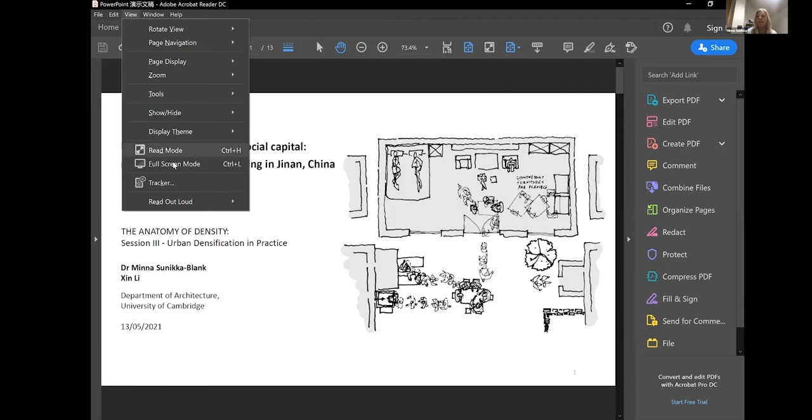So in our short presentation, we'll mainly say a few things about, let's say, the unintended consequences of urban densification on social capital. And we'll focus on Jinan in China as a case study. So Xin, if you put the next slide. So in the presentation I'll just give a very brief introduction to our framework and methodology, and then Xin will elaborate on the findings.

So what we have mainly been interested in is what happens in the urban regeneration project when households move from courtyard housing, what you see in this image, to high-rise, high-density housing typology. So Xin, if you put the next slide. That's the image on the right-hand side. So something which is very typical of Chinese urban regeneration, but a very common typology also in other parts of the world. So what makes China a very interesting case study, I think, at this moment, is that the big, massive national relocation project is coming to an end in 2021.

So there's a new approach or change in paradigm that regeneration would not be based anymore solely on demolition and rebuilding, but also renovation and gradual improvement of the neighborhoods by providing better insulation, lifts and services to the areas. Having said that, what always comes as a surprise to me is that in the Chinese context, an older building is a building that has been built before 2000, so also relatively new housing stock, but there's a kind of acknowledgement that the regeneration would need to address also, let's say, the social community.

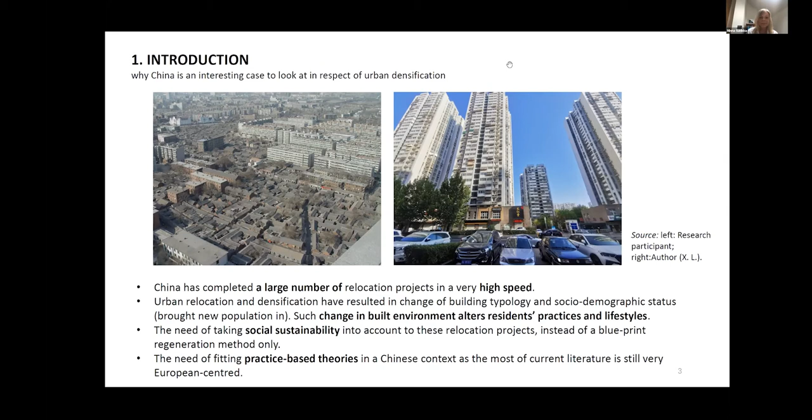And then while we use social practice theory as a kind of background, we combined that with literature from social capital. So we made a distinction among the respondents between whether they were stayers or newcomers. We categorized newcomers as people who moved to the area after the regeneration, and stayers were people who had lived in the area, for example, in courtyard housing before the regeneration. And we also looked at whether the interviewees were actually tenants or whether they were owner occupiers. And if you put the next slide.

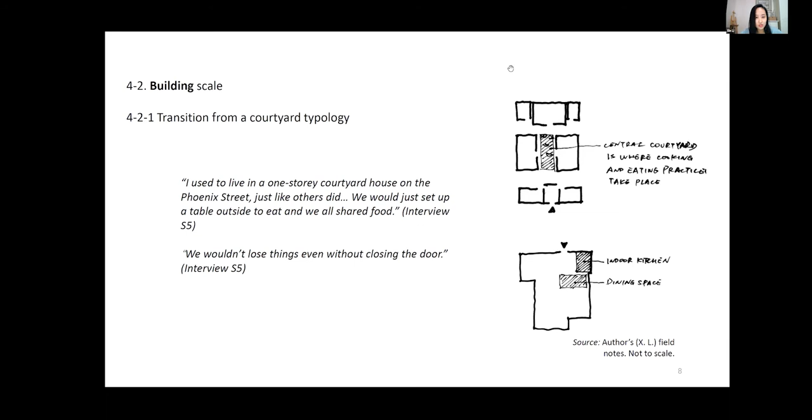At the building scale, before the restructuring, for stayers, daily activities such as cooking, eating, and hygiene took place in the central courtyard, outside. A key feature of living in such a courtyard typology as in the case study area is that residents can maintain a very close connection with their neighbors, meaning that more social interactions, especially informal ones, can take place in the neighborhood to build up mutual trust, which is one of the major effects of social capital in a neighborhood context. As one stayer commented, we wouldn't lose things even without closing the door. After the transition, these practices shifted from outdoors to indoors because the central courtyards disappeared.

In the courtyard house, furniture was used interchangeably and activities took place in a very flexible way. After the transition to high-rises, residents' need for privacy has led to inner spaces for particular uses. So this self-containment after the transition to high-rises has increased privacy and reduced the neighborhood social relations gained by sharing facilities. Further, the spatial dispersion of practices after the restructuring is not only caused by the change in the housing typology, but is also a result of a changing culture of living, moving from a collective form of living to more individualized practice performances.

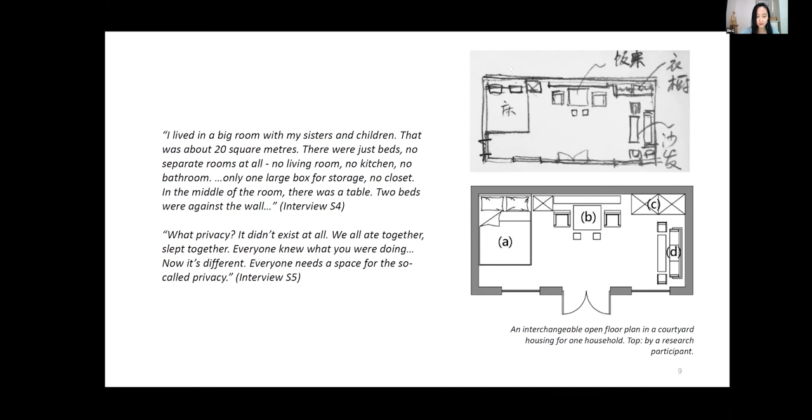And finally, a strong identity with the people and a sense of attachment to the area are mostly found in long-term residents and locally extended families. So a strong social network was formed by them. In this network, stayers maintain very close relationships with each other, and it tends to exclude newcomers, especially tenants. This is an outcome regarded as the dark side of social capital.

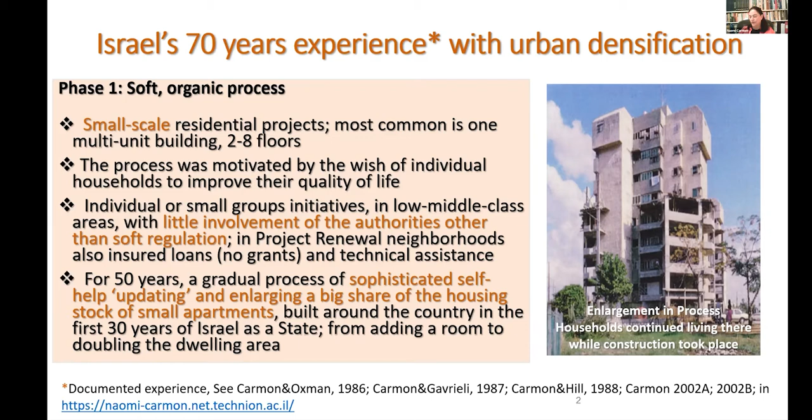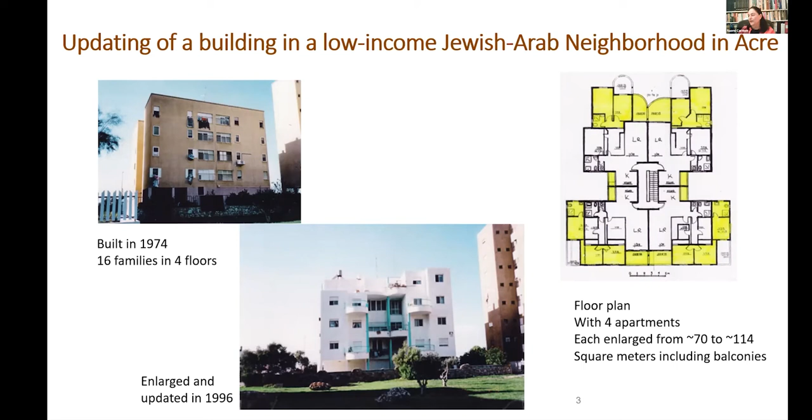We have here a nice example in a Jewish Arab neighborhood in Akko in Israel, Acre. You see the before, you see the after, and you can see in yellow the floor plan enlargement that made a real change. You have here 4 apartments in 1 floor and the enlargements. Okay, phase 2.

Intensive densification. That's in the new millennium. Urban densification is at the top of the government housing agenda. Unlike the first 50 years, now in the recent 20 years, it's up on the agenda because the government realized we have to build so many new houses and we don't want to take all the open land of the country for that. It's a small country. So densification is the preferred solution.

Resilience requirements were added, strengthening the buildings against earthquakes and building shelter rooms in each dwelling. It's especially needed in Israel, but as you know, resilience requirements are needed around the world in some way or other. And all that is expected to happen with the private market alone responsible for financing and execution. There is a general framework of public regulation and some master plans, but on the whole, it's the private market.

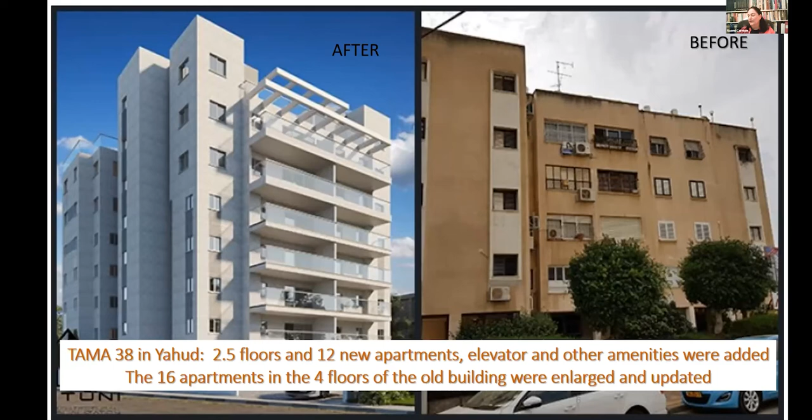There are 2 major outline plans: demolition and redevelopment, that's a kind of aggressive, in our words, densification, and a softer kind, Tama 38. I have here 2 illustrations. This is demolition and redevelopment, and the other one is Tama. You can see Tama 38 before and after. We are going to concentrate on this kind of program, and the floor is yours, Nava, to continue.

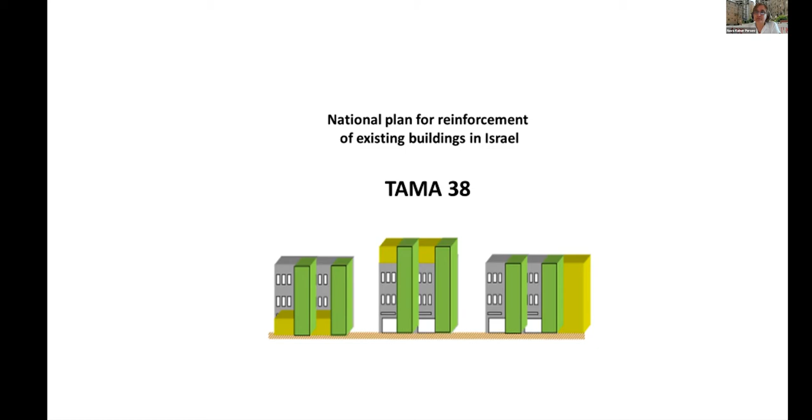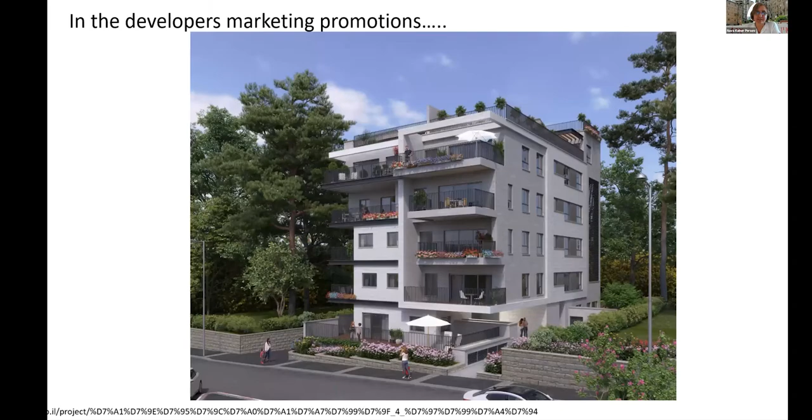Thank you, Nomi. So Tama 38 is really more like a medium-sized densification plan compared to the demolition and reconstruction that Nomi just showed. Tama 38 is a national plan for reinforcement of existing buildings in Israel. Here we can see the Tama in the developer's eyes, in a way kind of a villa in the park. But in reality, as we go on, we can see the Tama in the urban fabric as it looks.

So I'm going to concentrate today very shortly on a case study in Ramat Gan city, called the Negba area. Ramat Gan is very vibrant regarding Tama 38, second only to Tel Aviv. And this is part of a larger research, part of my PhD dissertation regarding housing regeneration strategies and their evaluation from the social justice point of view.

So I'll start with the first years, when Tama 38 was initiated in 2005. The local municipalities didn't really know what to do with this national plan, and they just created a uniform planning layer for the whole city.

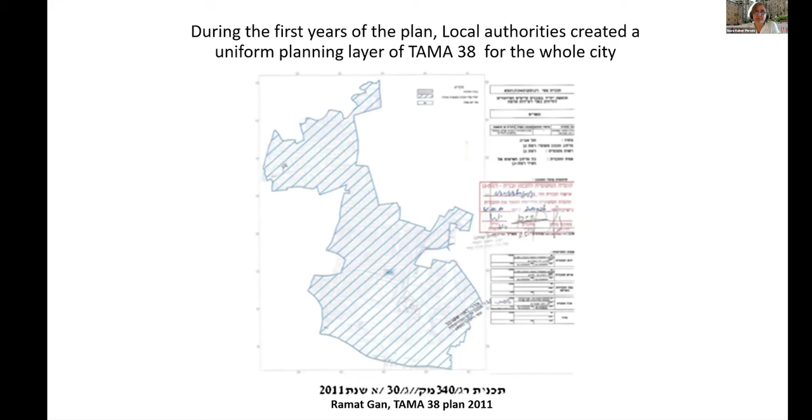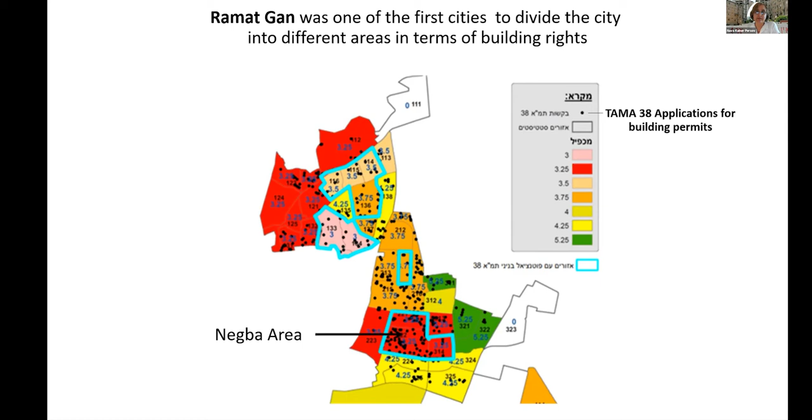After buildings started to be built in certain areas, and this is the Negba area, municipalities started to understand that they need to do something else, because they couldn't really realize all of those housing units as one uniform layer on the whole city. And they started to create special urban regeneration master plans that reflect the different areas of the city. And this is the area that we have studied.

This is an ex-post evaluation research, part of a larger research where we interviewed almost 100 households in Tama 38 and in demolition and development. In the Negba area, those are the buildings where we interviewed the residents. You can see that those buildings were not demolished, but I think this building here in Hasar Moshe exemplifies it best. You can see the first 3 stories, which are the original existing building, and on top of it, you can see the new floors. If you take a closer look at each photo, you can see it really easily as you walk on the street in Israel.

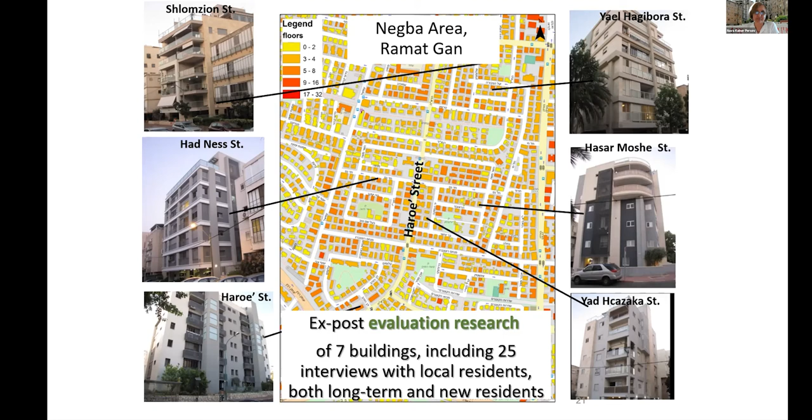So we have interviewed local residents, long-time residents and new residents, as well as architects, developers, lawyers, and city representatives. So I'll go to some very quick findings from this research. The first perspective will be of the long-time residents. We have to keep in mind that the urban regeneration programs in Israel since the 2000s are actually an economic deal between developer and homeowners. The homeowners sell the developer their building rights, and in exchange, they receive an additional room to their own apartment called a sheltered room, a mamad in Israel, which these days is really important.

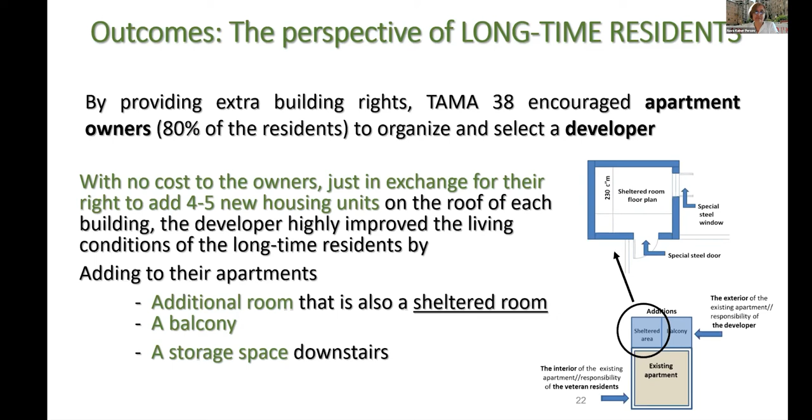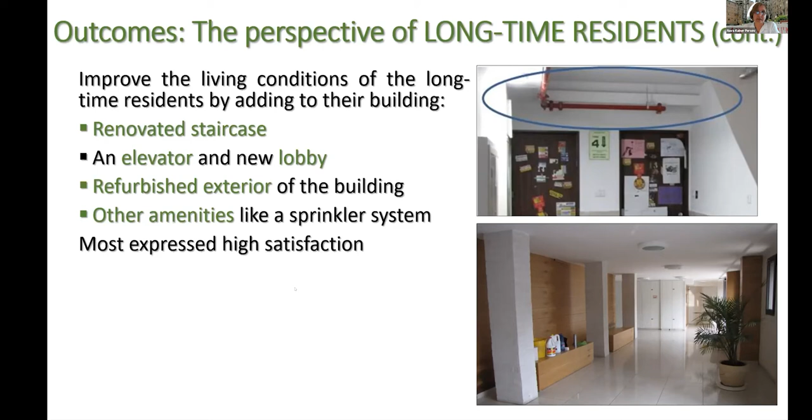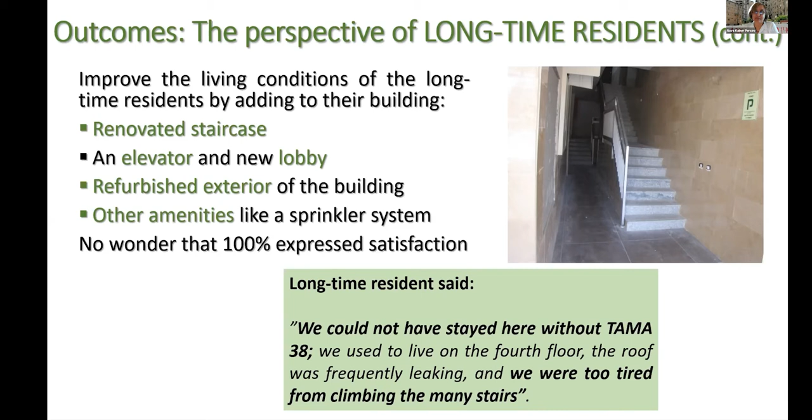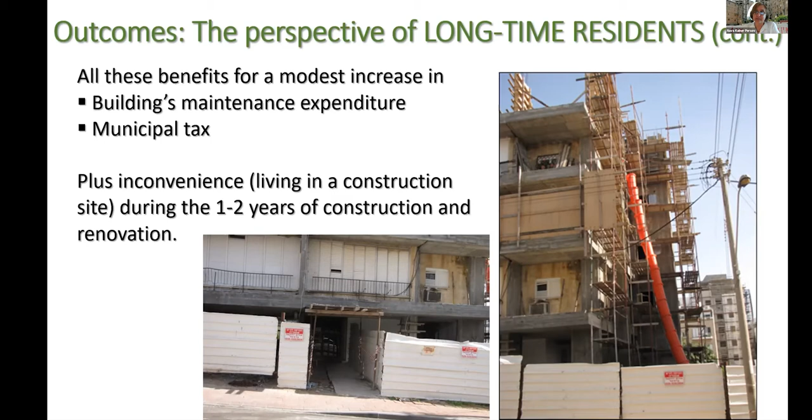Most of the residents are really very satisfied with this project. One elderly resident told us they could not stay in the building if they didn't have the elevator, since they had to climb up 4 floors. So this was really helpful for people who lived there for many years to stay in the same place. Of course, there were also obstacles, since the residents still live in the building while construction is taking place. They told us about the noise, the dust, the different people coming in and out, and even sometimes burglary in the building.

Now I'll move to the new residents, and one of our interesting findings was that the new residents in the Tama building are actually long-time residents in the neighborhood. 63% of the people we interviewed told us that they live on the same street or the same area. One of them said that she lived in the next building, saw the Tama building growing from her window, and wished that one day she would move in, and they actually did, and they were so happy about it. They could stay in the same neighborhood, same friends, same workplace, school for the kids, and more.

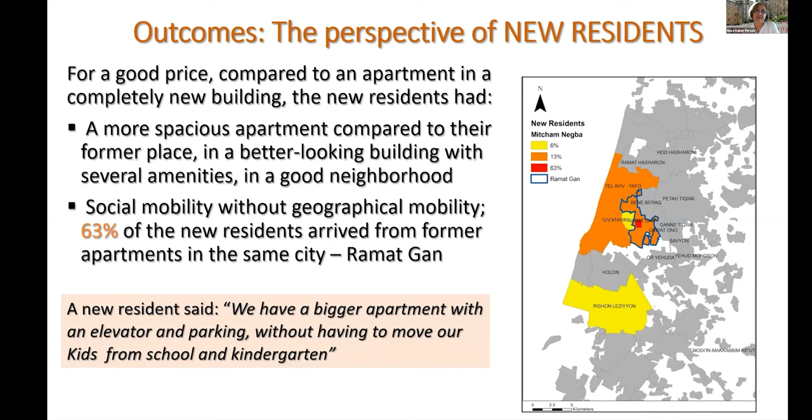However, from the city's point of view, the city realized that there is a problem with the carrying capacity of the different areas. More than that, as part of the incentives given to Tama 38, some municipal taxes are waived. So the municipality has some budget shortage in providing all the public services to the new residents coming in.

And I will end this case study about Tama 38 with another thing we found out: if in the city we have an old apartment in an old building, most of the time small, or on the other hand a new apartment in a new building, Tama 38 gives us steps of more affordable housing in the city. So we have an old enlarged apartment, a renovated apartment, as well as a new apartment in Tama 38, which gives many more opportunities to different homeowners to come and stay in the center of the city. Nomi, now it's your turn.

And I would like to conclude our presentation by saying that we need various strategies for different cities with diverse populations, with a diverse forecast for population growth, real estate markets, and cultural groups. Our analysis of the Israeli case introduced two non-aggressive strategies that we put an emphasis on. We did not talk about the demolition and redevelopment that we also have.

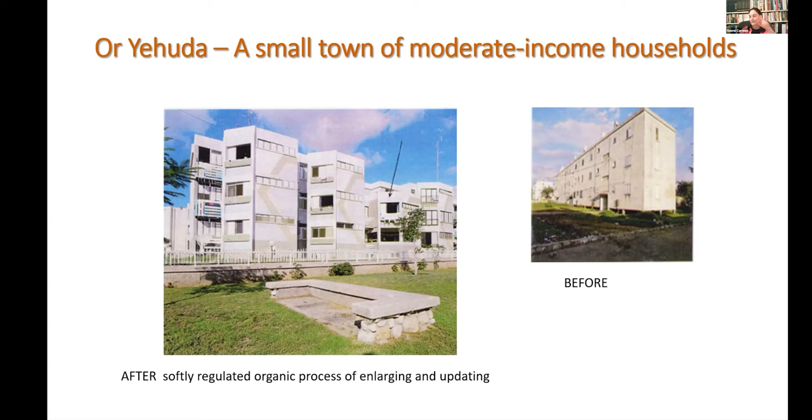The second soft strategy we presented is densification without demolition of the old buildings, style of Tama 38. Its implementation differs according to the real estate values in the area, between hot demand areas and low demand areas. In hot demand areas, the economic forces are so strong that the process can work with no public money. However, in order to avoid harms, as we have seen in Israel, it needs public regulation, not public money. General guidelines by the government authorities, plus a policy document of the municipality considering the carrying capacity of different neighborhoods. The story is very different in low demand areas.

There, the economic forces are so low that planners and other stakeholders should enact and synergize special tools of 5 fields: planning, engineering, financing, which means pulling public, private, and third sector resources, social communal tools, and administrative managerial. We have no time to talk about a big research that we are currently working on in Israel, but we are not only studying, but also trying them in the field, and have first indication that in this way it can work also in low demand areas. Here we have several examples of Tama 38, before and after.

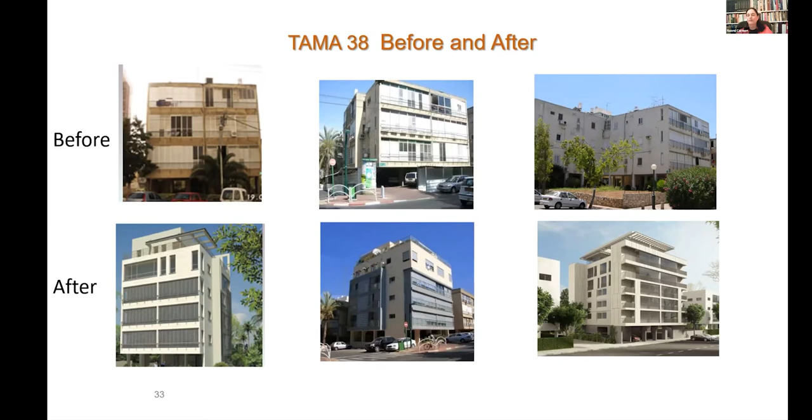And we move on to the excellent causes for non-aggressive densification strategies, such as the ones we presented. Causes are socioeconomic, moderating the trend of rising housing prices that usually accompany aggressive densification, such as demolition and redevelopment, and also curbing common displacement of the poor, or at least the less affluent residents of the city. We have cultural reasons, conserving unique modes of life; we want cultural variability in the city. We have environmental reasons, saving the enormous waste of material from demolishing old buildings and constructing buildings from scratch. And last but not least, encouraging diversity and avoiding uniformity.

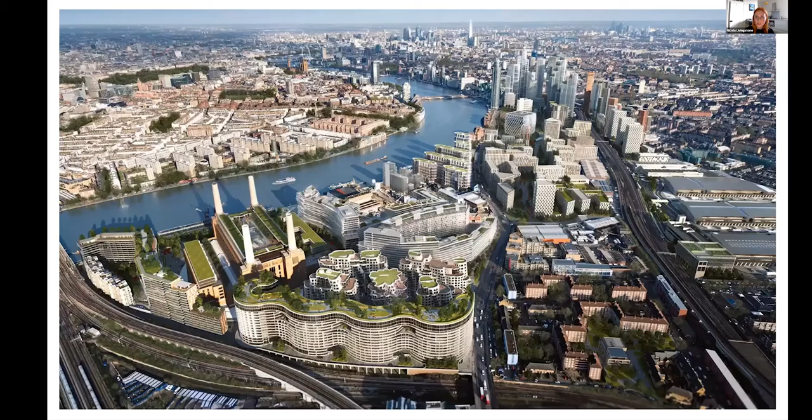You can also see at the very top on the right-hand side of the photograph, clusters of high-rise towers in the north of the development towards Vauxhall, and they're up to around 200 metres in height. There's more medium-sized density around the Battersea Power Station, so these are up to kind of 60 metres in height. However, I suppose the idea of medium rise is quite relative, if we look at the difference in height between the new development in Nine Elms and compare those with the development on the bottom right, which is the existing housing in the area.

So although the opportunity area planning framework is aiming to create a prestigious destination for international investors, anchored by the rejuvenated Battersea Power Station and the new United States Embassy, which you can see just south of the towers there, it also recognises this need to upgrade local amenities because there are high levels of social deprivation around this opportunity area as well. So again, it's about the pros and cons and the potential impacts for everybody involved in this local community.